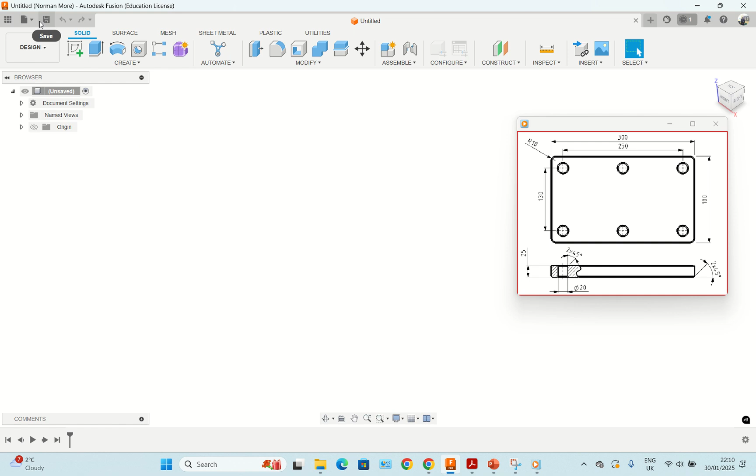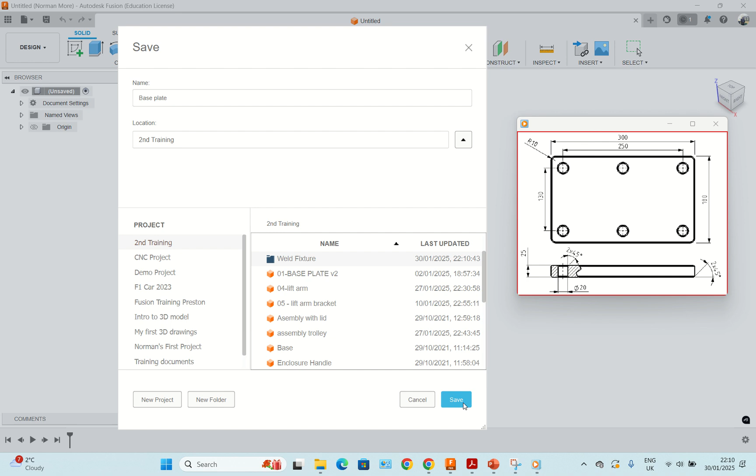I'll call this one base plate because it will form the base of this assembly. And as for the folder, I think I will have a new folder, and I'll call this folder Weld Fixture. This is very important for you when you're starting a new project. So all our files are going to go there.

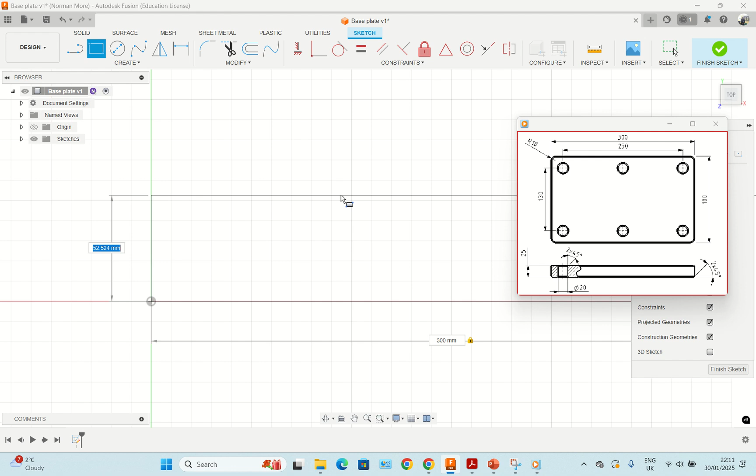Then I save. I start off straight away with a sketch, and since it's going to be the base, I'll put it on the top plane. Pan it to the left, and then go for the 2-point rectangle. The length here is 300. Press tab and put the height, which is 180.

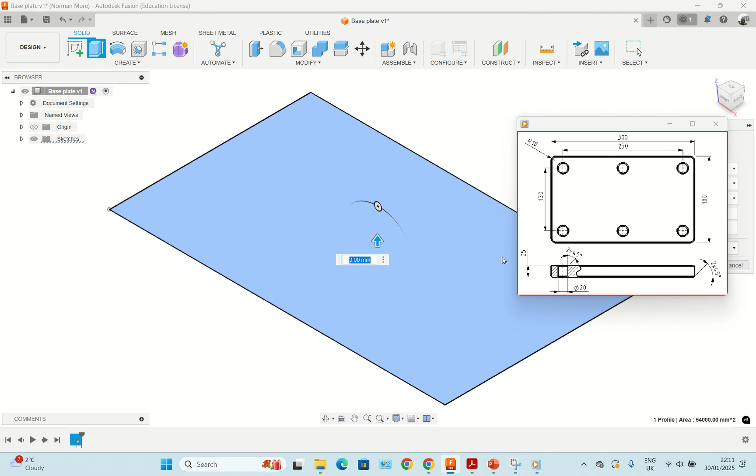And then we have a rectangle there. I straight away go to extrude this rectangle, and the depth, I can click on the small house there to see how it is going. The depth is going to be 25 from the drawing, and I press enter.

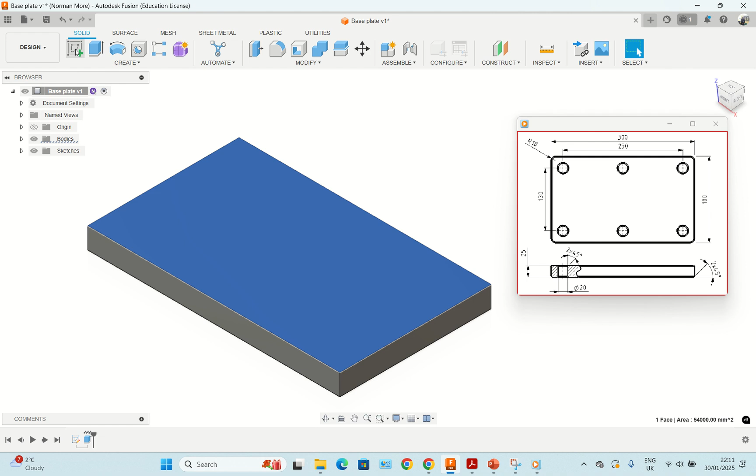Now there is a chamfer at the top. That one we do after. So now we put holes. I click on the top face and then do sketch again. Once again, I draw. Well, there's a lot of ways you can do this, but I can just draw one circle somewhere.

Each of these circles, you can see the dimension there is 20 mils. So I put 20 mils. Those holes are 25 millimeters from each corner. So I can do that, and then I can use a pattern, or I can just draw them locally.

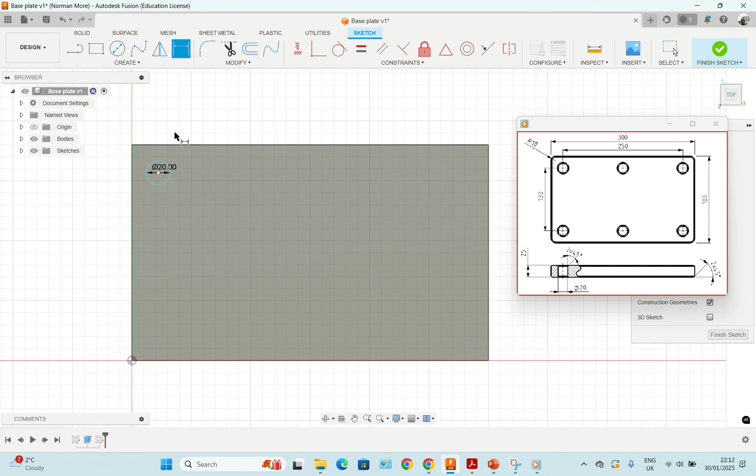So I'll just do this. I know it's 25 from that end and 25 from this end. So that gives us one of the circles.

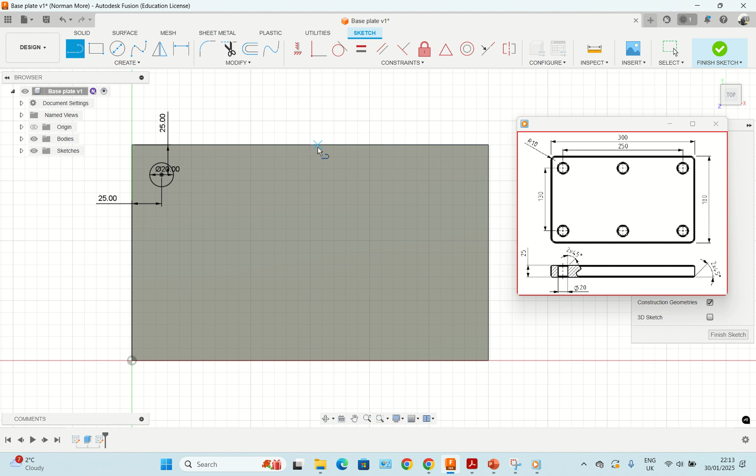Now I can put a center line, just track center line. So I put here a line, and then using this other tool there for construction, I change that line into a construction, and then I will mirror that one hole I've done on the other side, on the right side.

So if I click on mirror, select this circle, select the mirror line, then I'll get the other circle there, which will also be 20 millimeters.

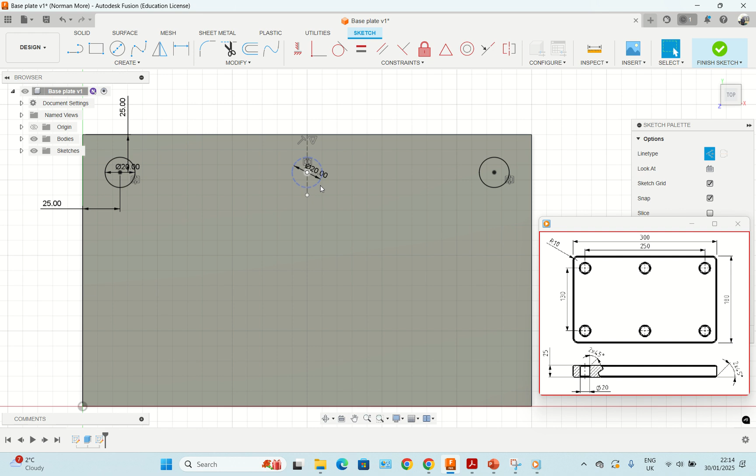I pick the circle command, track this other one from the left up to the center here to make the other hole, which is also 20 millimeters. So my construction was still active, so we need to change this to a normal line.

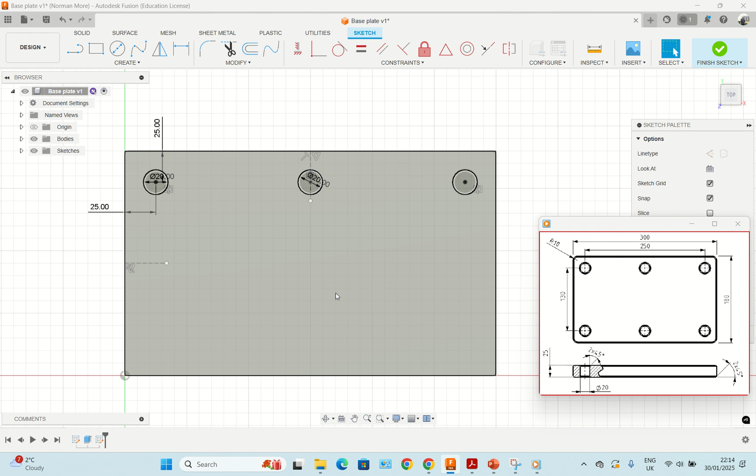Now I have 3 of them already, so I can get another construction line along the center on this side. Press escape and remove that construction this time, and then I can mirror all these 3, 1, 2, 3 on this line.

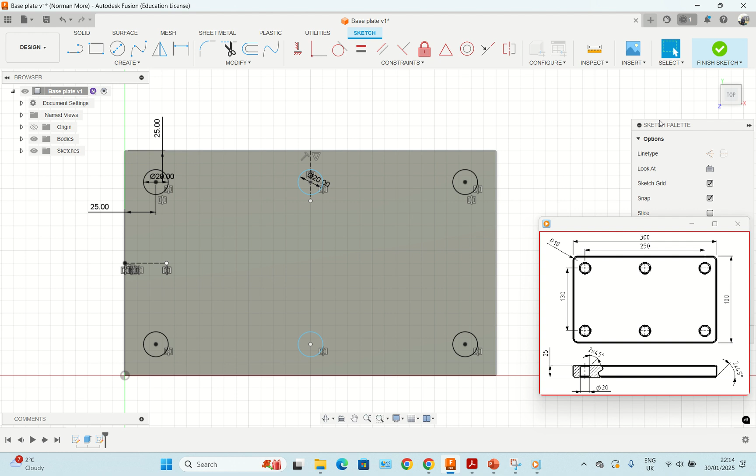Select mirror line, and now I have all the 6 holes. So if I click on the small house, then I can see what is going ahead. Then I press E for extrude.

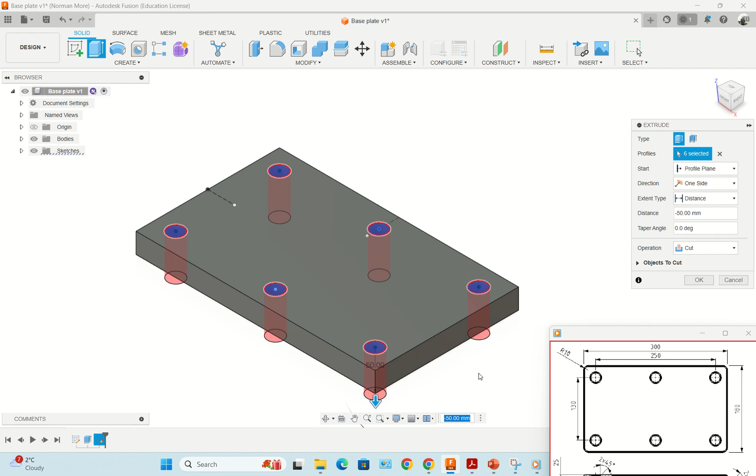Now we are going to do a cut. So I can either put a negative value, or let me put this one a bit down here so we don't need it anymore. I can put a cut, or I can drag this arrow, which is the easiest actually, downwards as much as possible, so long as it goes through, and then I press OK, and that one is done.

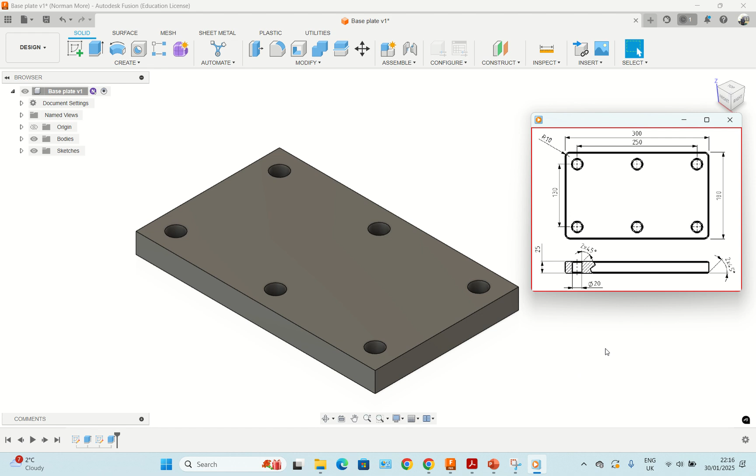So if you look at this, it will be missing now. It will be missing the chamfers at the edge, which is 2 mils, and also 2 mil chamfer around the holes.

Maybe we need to do fillet first. So I start with fillet and pick all the 4 corners, and the fillet is 10. Then I click OK.

Then I do the chamfer. Chamfer is 2 millimeters. If I do the edge, I put 2 mils here, and then the same chamfer is on the holes.

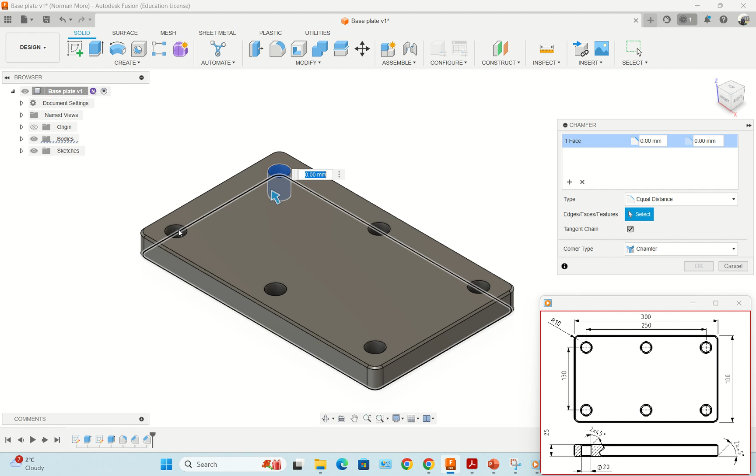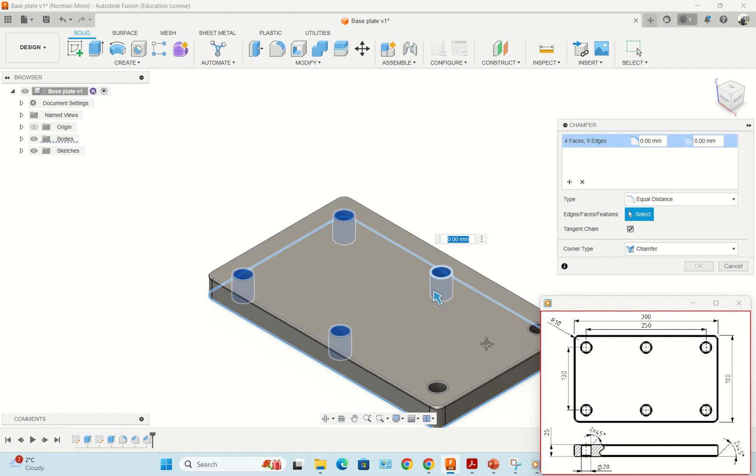And then the holes also have chamfers. If I click chamfer, I can click, let me do the whole hole. Do the holes.

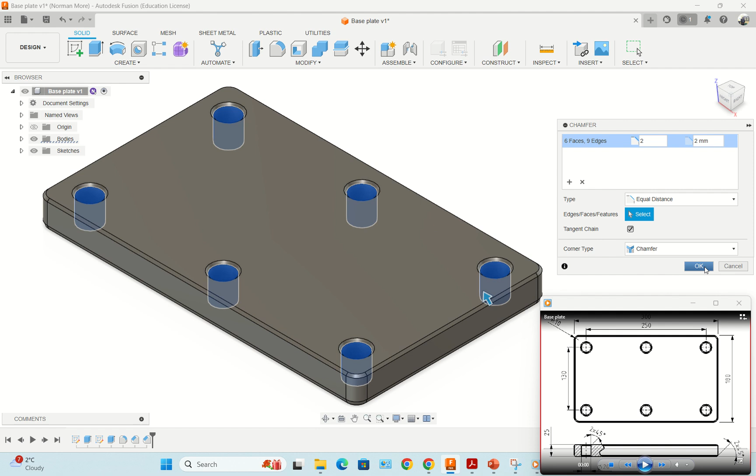Then I put 2 mils and I click OK. So this one will have chamfers on the top, on the bottom, and that piece is now done. So wait for the next one until we go to the assembly.